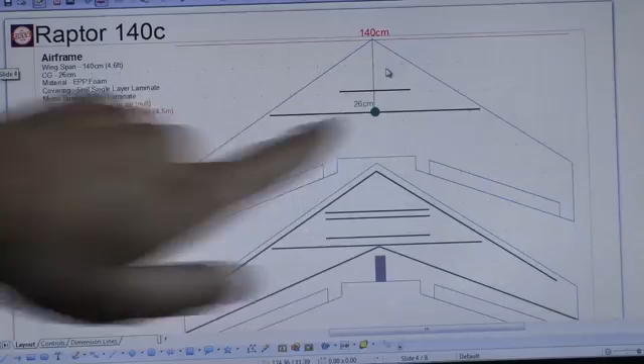Okay, here it is, the Raptor 140C. It is based, of course, on the Raptor 140 platform. It is literally the same Raptor 140 wings and everything as I sell on my store. Nothing modified in any way. That means it's going to have a 140 centimeter wingspan, or about 4.6 feet. The CG is going to be back 26 centimeters right here, where you can see that main wing spar. And 26 centimeters from the nose means the CG is just about as balanced as you can get.

It's going to have almost zero reflex or sweep. So these elevons are almost going to be completely neutral, which is good for efficiency, but it does make it a little tip stall prone. So just something to be aware of as you pilot this kind of airplane. You'll need to be cautious when you're going slower. At any rate, the material is going to be EPP foam, so no change there. I should say any text in black is no change. Red is modified. So let's keep going, just a key there.

The motor support, basically, I have extra layers of laminate to support the motor mount area. Now the leading edge, I'm going to add a layer or two of 5mil laminate. As this airplane is going to be landing faster and in probably more different locations, like I did on the cross-country trip, it's not going to land at the same field. I may not always be able to choose the most ideal landing setting. It might land in some brush, and so I need a little stronger than just a single layer of 5mil laminate can provide.

Now the wing spars, the prior version had 4.5 meters of total carbon fiber wing spars. This is going to go up to 6.4 meters, or 21 feet of total wing spars. It's a lot of wing spars, but it's just additional support and strength as it's going to be a little heavier. The elevons are the same size, 5 centimeters by 48.5 centimeters. Gives it plenty of control authority, and they are large enough control surfaces, so there's not a lot of drag when it does initiate a roll or a pitch control.

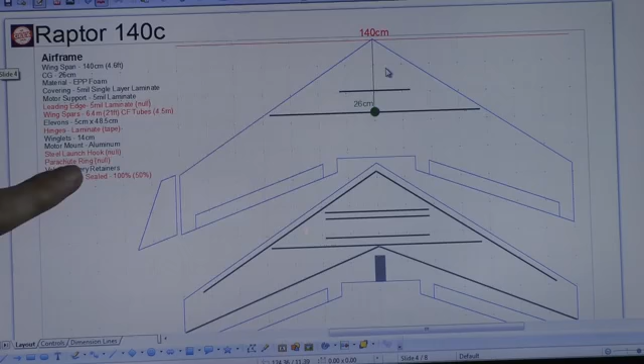This is something new, the parachute ring. Basically, I'm going to do a little cheat here. This is kind of leading into what I'm working on now. I'm working on building a parachute for the 140. Here's the deal. When I come in for a landing, sometimes I'm going to have to come in really fast, and I'm nervous about how much glide ratio the 140B has. And so into the 140C, I'm going to build a parachute ring. It's basically going to be a little ring that's going to attach to one of the carbon fiber wing spars, and it's going to be a hook above the airplane.

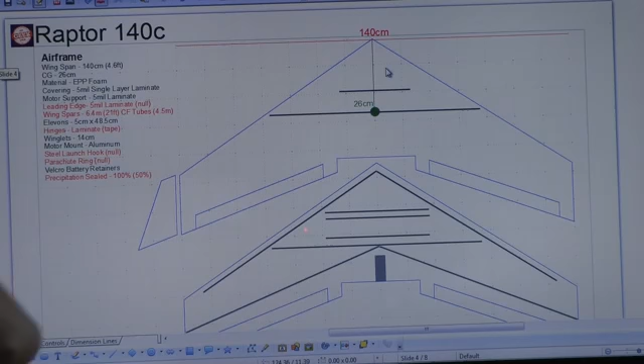And so what I'm going to do is I'm going to be able to allow a servo to open up a hatch and open up a parachute about the same size as the 140 is, and that should basically allow for a parachute landing, like a parachuter would do. Anyway, it's going to be really interesting, and of course we'll be trying that. But the ring is just basically something that's hooked directly into the wing spar itself.

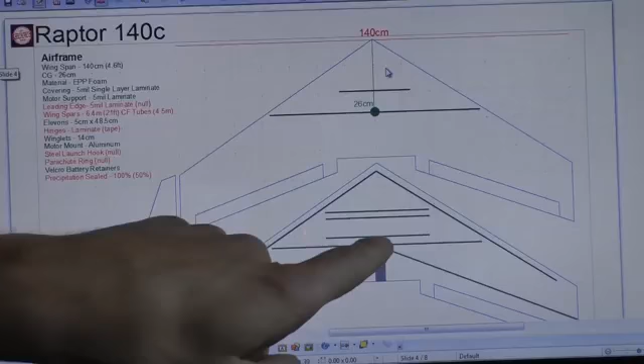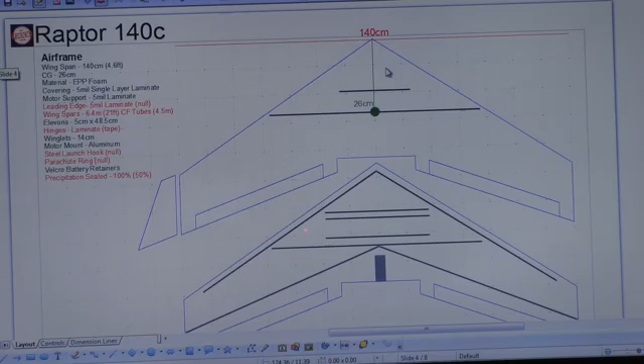Velcro battery retainers, nothing different there. And then it's going to be 100% precipitation sealed, so it could fly in rain. This is going to be the first airplane that, if it's raining, foggy, whatever, is going to be able to fly through that. The 140B is pretty much precipitation sealed, maybe 50-80%, so it can land in snow and stuff, but to fly in the rain, the 140B is not ready for that. But the 140C will be able to do that. So that's kind of the setup.

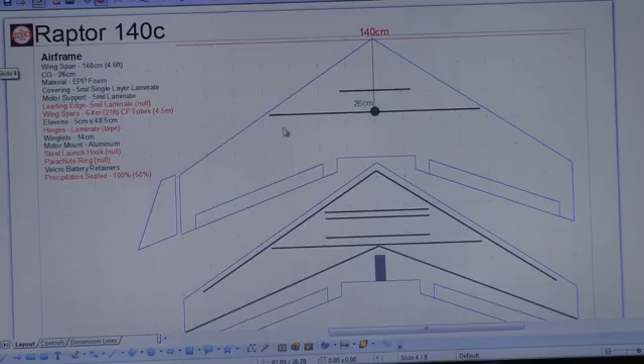Nothing's too different from the 140B. Again, these are the wings. These are the spars for the launch hook and parachute ring. And aside from that, the top is also going to have a carbon fiber rod and another one up here, just because there's a lot of weight up here, as you'll see in a second. Cool. So that's the airframe. Now here's the core flight components. This is going to look a little different, and I'll walk you through it in a second.

The speed controller is going to be still 60 amps. The receiver is going to be EzUHF 8-channel 433 megahertz. So we're going to a higher power, longer range frequency. So instead of 2.4 gigahertz, we're going to go to 433 megahertz, and that's going to give us a lot more range, well beyond line of sight. Of course, we're going to maintain line of sight during the trip, but it's just going to give us a lot more to work with.

Also, that module will be external, so it's going to sit outside the transmitter on top of the vehicle, and that'll allow us to control the airplane from inside the car with the controller inside the car, yet the antenna will be outside the car, so the car won't be basically a Faraday cage anymore, and allow us a lot better transmission of our radio frequencies.

Our servos are going to be digital 32 gram, 3.8 kilogram servos instead of the 11 gram, 2.2 kg servos. So a little bigger, a little heavier duty. This airplane's going to be heavier. It's going to have a longer endurance, longer flight. It's going to endure more abuse, and so they need to be a little stronger. And the servos I have now have been working fine. I just would feel a little more comfortable, sleep better at night if I knew they were bigger and a little more durable.

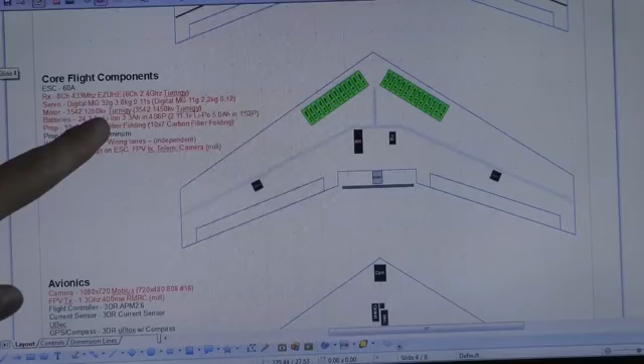The motor is the exact same size, 3542, except it's going to be a lower kV rating. And I'll tell you why in a second, but it's going from 1450 to 1250. Okay, now here's the biggest thing. The batteries are going to be 24 cells of 3.6 volt lithium ion 3.3 amp hour in 4S 6P configuration. In other words, 4 in series and then 6 of those in parallel.

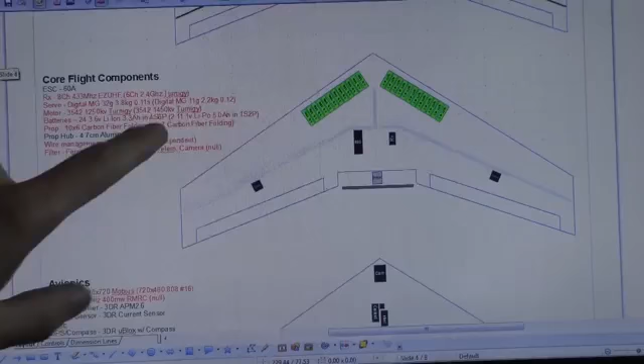And what this is basically going to give us, it's kind of a long discussion, but these lithium-ion batteries, these little batteries you can see here, cost twice as much as a LiPo battery, but they weigh half for how much power they give. So basically, if you were to match the same power of these lithium-ion batteries in lithium polymer batteries, it would weigh twice as much. Now, I don't have the figures in front of me. I should have this, but if you multiplied 6 times 3.3, that would give you the number of amp hours this is going to carry.

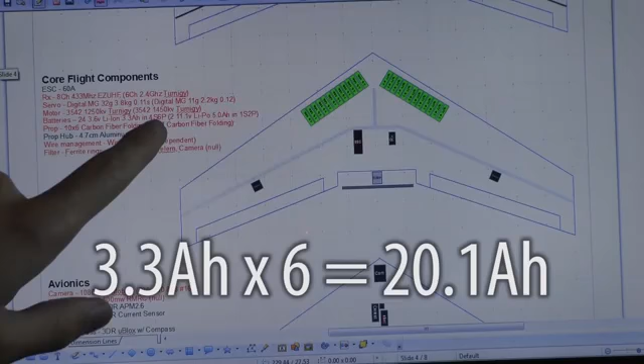But the other deal is it's in a 4S setup. So instead of 11.1 volts, I want to say it's 14.4 volts. So that's why the higher voltage correlates to a lower kV motor. Anyway, these batteries are incredible.

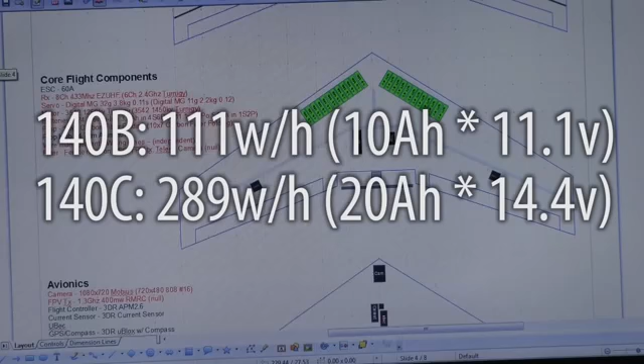This is going to give us per watt hour, and I should know this. In fact, I'll put this splash up on the screen here in a second. But the watt hours, which is probably a better measurement to carry, that's volts times amps. I want to say it was 111 with the 140B. And I'll correct myself here in a second if I'm wrong. But the 140C, I want to say is going to carry 289. So over twice the capacity, so it could fly twice as far.

And to put that in perspective, the Raptor 140B just did a 52 kilometer flight using 80% of its batteries. So we're thinking 100 kilometers here on this setup, which would be just incredible. 100 kilometers would be very impressive.

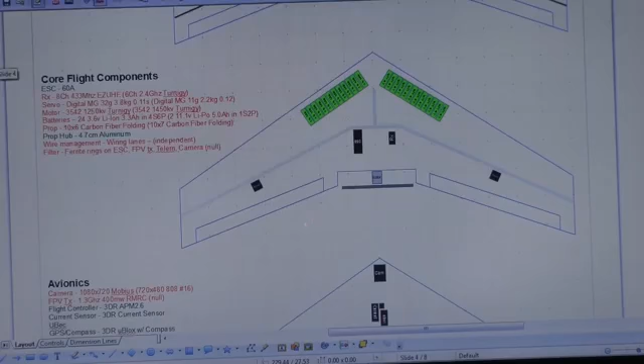Okay, so the prop is going to be a 10 by 6 carbon fiber folding instead of a 10 by 7. Again, just one more pitched down. That's just because of the higher voltage motor. Prop hub is the same.

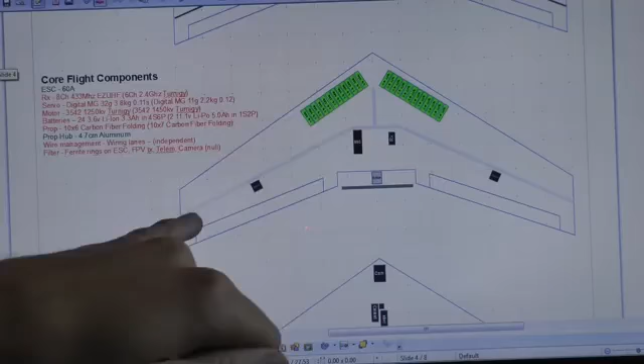The wire management, this is not that exciting, but it used to be that my wires, and you probably see it in the 140B, they're just kind of all over the place. And it just gets kind of hard to manage to add new components. So instead, this time I'm actually going to cut in little lanes, you can see here in gray, and this is going to allow my different wiring to be put in here.

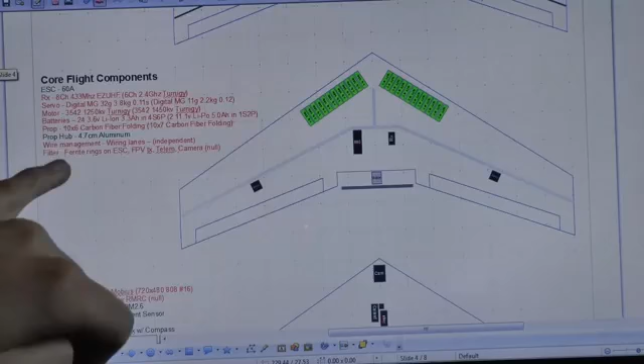And that could be an interesting issue, because with those wires being in such close proximity, particularly my telemetry and my FPV, yes, we're adding FPV to this, then we could have interference with the servos or other stuff. And so I'm going to be adding some ferrite rings or filters on my speed controller, my FPV, and my telemetry, as well as my camera power. And so a lot of red text here. That's a lot of changes for the core components. So that's that setup.

So a little further down, the avionics have some changes as well. The camera, instead of the 808 camera that I have now, that's 720 by 480, I have a Mobius I'm going to put on this one, and it's going to be 1080p by 720. And this also has AV output, so I'll be able to connect it to my FPV transmitter, and so I can record and transmit at the same time, and that'll be really helpful to reducing weight and just for simplicity.

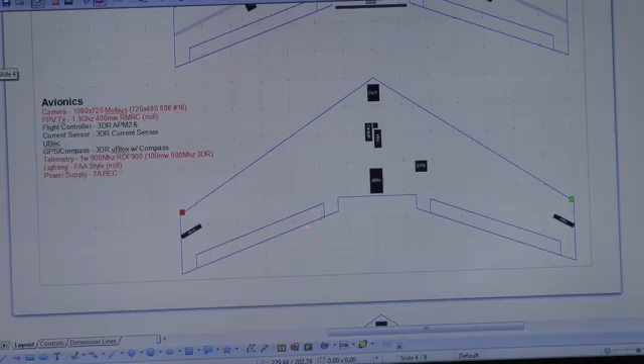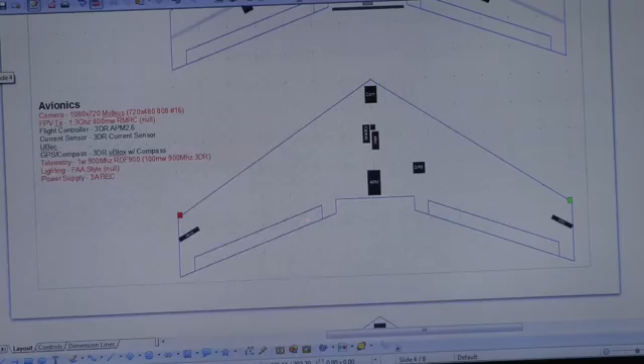My FPV TX, I'm looking at Ready-Made RC. They have a 400 milliwatt 1.3 gigahertz. So that's the frequency I'm going for FPV, 1.3 gigahertz. And that should give me pretty good transmission. Now that's not the strongest transmitter, obviously, but I think 400 milliwatts, not megawatts, 400 milliwatts will be plenty for what I'm doing. And really, FPV is important, but it's not the primary system that I'm going to be using. I'm actually going to be using telemetry probably more than FPV, although FPV will be important.

The other thing to remember here, this airplane will be within a kilometer or so of the chase vehicle pretty much at all times. So 400 milliwatts is plenty of power, obviously. We'll have way more range than that, but, you know, I'll have a lot of excess just in case something comes up.

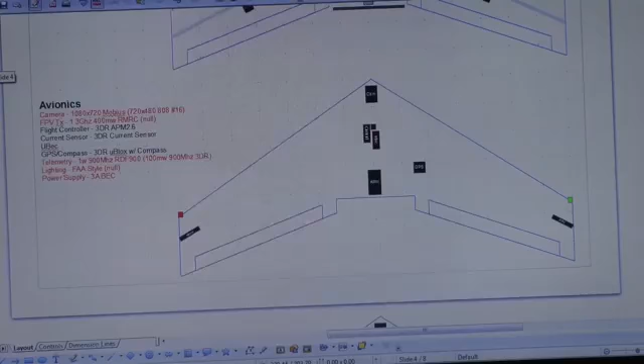The flight controller is going to be an APM 2.6. Not going to the Pixhawk quite yet. I'm just waiting a little more time to see how that works out. They're just shipping them now. I'm sure it's a great product, but I just want to give a little more time for the environment to kind of adopt that and to see how that goes. The current sensor is going to be on there, 3DR current sensor.

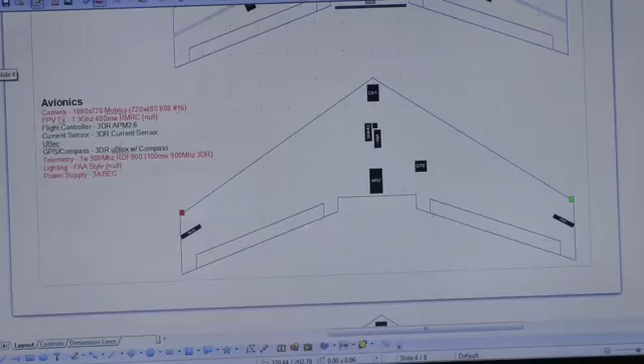I'm going to have a UBEC, I want to say 3 amps or 5 amps or something, but basically it's going to power the different components that need power. Particularly, I believe, the telemetry, which I'll tell you about in a second, was going to demand more power, as well as that camera is pretty thirsty. So we're going to need power separate from our ESC BEC, because the ESC BEC is powering the servos. And then, of course, the APM is powered through the current sensor. So we have 3 power supplies on this airplane. It's going to be pretty cool.

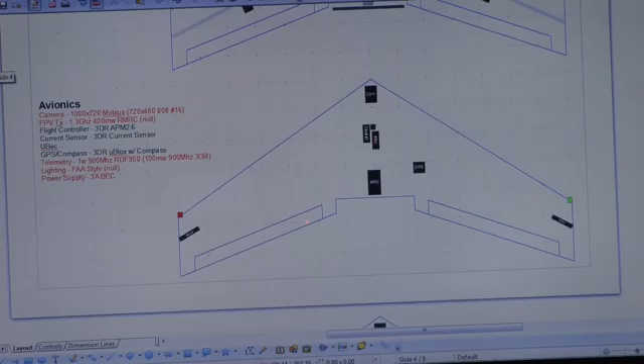Okay, the compass is going to be the 3DR u-blox with compass as well, and that's just like it is now. Telemetry, looking at going with the RFD900, and that is a 1 watt 900 megahertz transmitter, or a transceiver technically. We used to have 100 milliwatts. Now 100 milliwatts would give us about 1.5 kilometers of range, so 1 watt is going to give us a significant amount, 5K or more. Way more than we'll need, but again, why are we doing that? Well, we're doing it just to overcompensate for whatever could occur during the USA trip. For whatever reason, we become separated from the airplane. It'd be really nice to be able to maintain as much radio connectivity as possible.

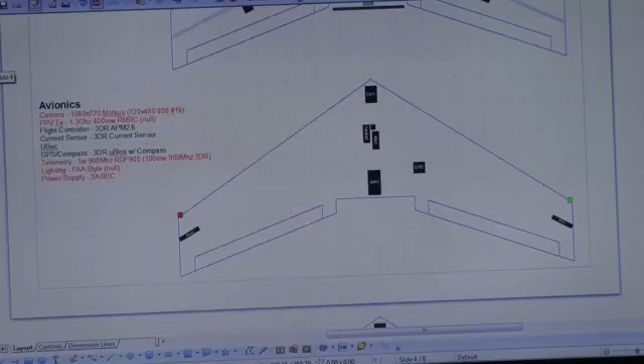Lighting, going to add this kind of FAA style that's red, green, and strobe. That just makes it more visible to the pilot in low light settings, like dawn or dusk, and just more visibility in general. And, oh, there's a power supply again. So I've got it in there twice, obviously. I'll delete that. So that's the avionics, and boy, that went fast. There's obviously a lot to this. This is kind of everything together, just a quick view to see how it all laid out. And, man, it's kind of anticlimactic, but it's going to be incredible.

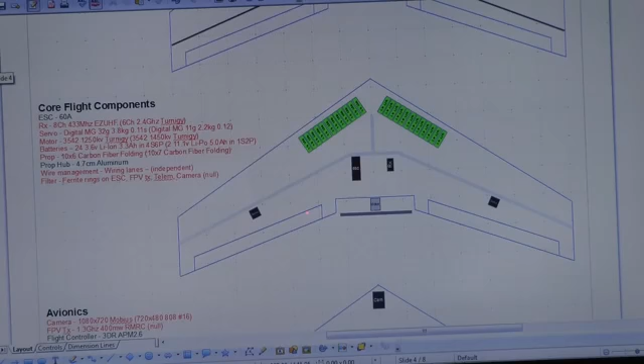The airplane is going to have roughly the same thrust as it has now, although it will have more potential because it'll have the same speed controller, but it'll have higher voltage. So technically, in an emergency situation it could accelerate faster. But really, this airplane's biggest improvement is just stronger stuff. Bigger servos, a little stronger build construction, and then really it's about technology. The FPV is brand new, a more powerful telemetry transceiver is going to be huge, and the batteries obviously are the biggest. We're adding just a little bit of weight, but about twice the capacity. So generally, we're getting closer and closer.

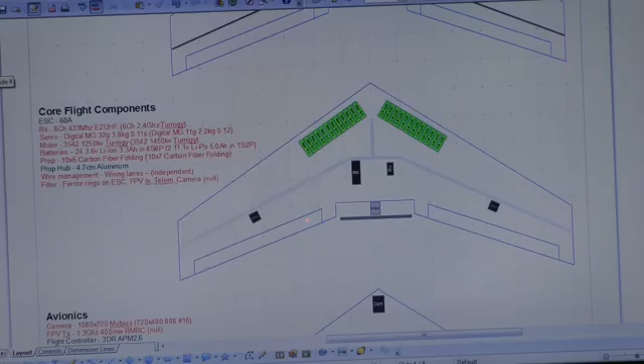Now, is this the airplane that'll cross the USA? Probably not. There'll probably be at least one more addition between this one and the next one, but man, this is getting close. This is starting to fit the bill of the USA trip more and more every time, and I'm trying to think of what else I'd really add. We may have to add more power. My calculations showed I'd need more like 300 watt hours instead of 200. So we may need another bank of these, but we are getting really close.

Alright guys, now that's my setup. Let me know what you think. Am I missing anything, or are any of my components not what you'd suggest? I'm going to start ordering and putting this together right away, so be quick. It's going to take about a month to put together, but soon enough, the Raptor 140C is going to be in the sky, breaking records all over the place.